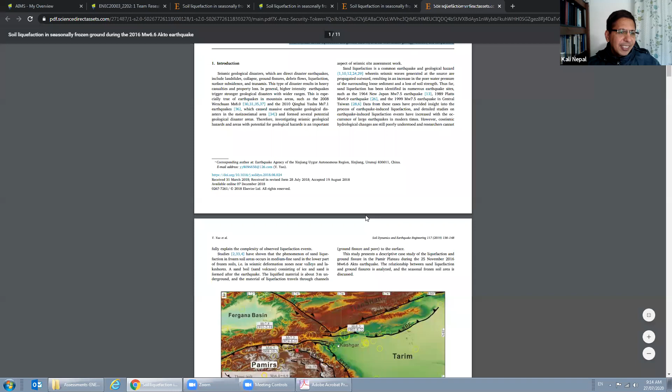Okay, look at this paper. So now I first learned the abstract, what it is all about, how they do it. There is an introduction, literature review, background, everything is there, right? Yeah. And at the end, oh, I want to know more about a particular thing now, right? So there is a list of references at the end of the paper. You see, now look at the references here. That many references. So now you can access any of those papers through the CQ library, right?

So you build on your skill, build on your skill, and then go inside, what we call it, dig deeper into the subject matter. And at the end, you summarize results. I want it like this. Okay, this is one of the journal articles. Of course, it depends on different topics, right? It's different for everyone. So I want exactly this type of journal preparation from you.

Okay, so I have provided the reporting template, and at the end, in I think week 7 or 8, you guys in a team will be presenting to all of the class what you found about that particular topic. Can you start, guys, now? You can choose any topic within your group, right? That's fine. I don't mind, but it should be a little bit more advanced level. It's not just the basics; for example, sieve analysis cannot be a topic. That's too simple for you, all right?

You cannot do the effective stress principle, because that's the fundamental in soil mechanics. You can't say Mohr circle. That is too fundamental. So you need to choose a little bit advanced level topic and investigate that topic. Any questions regarding this? It's okay, right? That's how we do the research investigation.

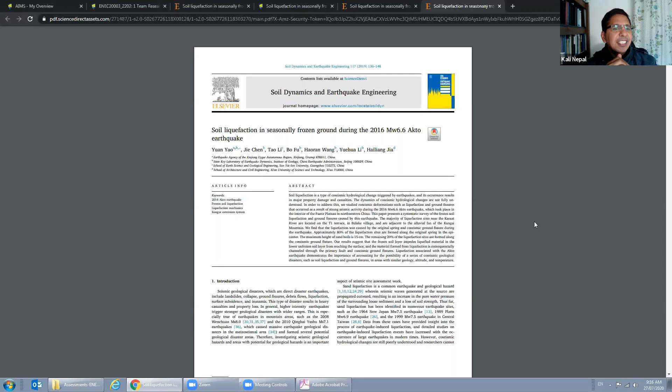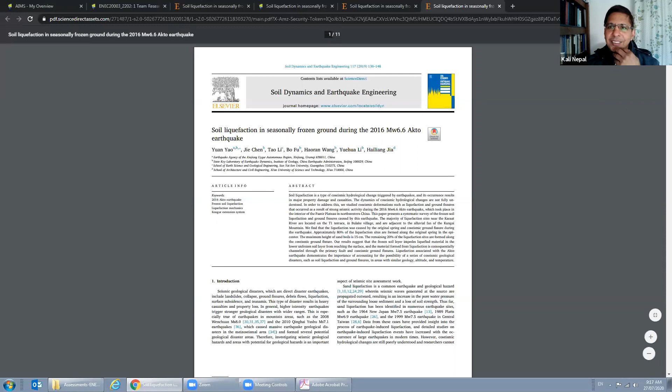Could you please discuss with each other and start preparing this? There is no one right or wrong answer. This is preparing you for how you investigate a topic that is new to you, how you investigate and do research. Is it okay? Can you do that, please? Start that right now, all right? If you don't have any questions, I will now move on to my lecture.

Okay, that's how I show you how we start investigating topics. So you see the report template is also there, how you write the report, right? And then there is a presentation template also given. So you need to present at the end. So overall, you will get around 30% marks from this research paper. Okay, you can build on, for example, new methods we learned in bearing capacity. There are a few new things we learned already, shallow foundations, bearing capacity.

Okay, so based on the literature, which method is the best out of those methods? I think that was the question asked by Kasun, right? Which method do I use? Yeah, so can you investigate based on new scientific literature, right? They reported some values of bearing capacity from the pile loading test, plate loading test. So which method gives the accurate result? You can investigate that too.

You see, you can further extend what we learned until now. So you need to choose the topics freely, please, and do the research investigation. All right. Is it clear? Did I make this clear? Okay. Now let's move on.

Move on to my teaching things. There should be somewhere. Yeah. So go back. So these are the resources. We are in week 3. Week 3 means we are starting pile foundation today. All right. Please, guys, do ask questions if you want, whether it is clear or not, but I'll start now. Okay. So let me connect my writing pad first.

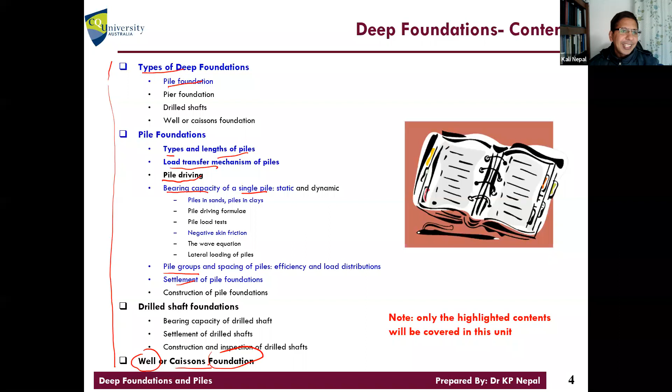If you want to choose one of the topics, for example, well foundations, or how we design caisson foundations, for your research, that's good. This is the extra thing to learn outside of your unit. So that's how we will be doing this week and next week. Do you know why we need to use deep foundations? Soil.

Because soil near the surface is not good enough to carry the load, we need to put the load transfer deep into the ground. There can be many situations. There is a high water table, meaning bearing capacity is low. If there is water, bearing capacity of the foundation is low, so it's better to transfer into the hard stratum below.

Sometimes when we excavate, it is too expensive to remove the soil and put the foundation at the bottom, so you can put the pile in. There are many cases you can read about. Pile does a lot of things.

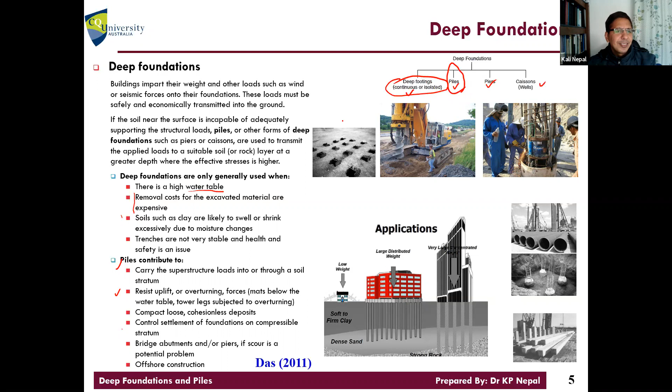So deep foundations, again, deep footings, or it can be piles, piers, or caissons or wells. We will be focusing mostly on piles. Deep footings, that is not that good, it's too expensive to excavate the soil and put the footing deep. So don't try to waste money and resources, just use the piles, that would be easier.

So this is pile. One thing it does is usually transfer the load into the hard strata below, because this layer is not strong enough to carry the load. Another thing is, even if at the bottom it doesn't reach a hard rock or bearing stratum, still it carries the load through friction on the side of the pile. And it can be used for lateral loading also, because piles are long and confined with the earth, so they can carry horizontal loads.

Also there are maybe sometimes swelling of soil at the top, but there is a stable soil underneath. It's better we go inside the deep soil layer and put the pile tip over there so that it can carry better loads.

Or it can be like, in this case, sometimes there is an uplift pressure, it goes up - I'll talk about negative skin friction later on. Because of the friction, the soil holds the pile in its place. Or it can be sometimes at the top there is erosion, so that even though it is eroded, because of the deep foundation, the pile at the top, still the structure is stable.

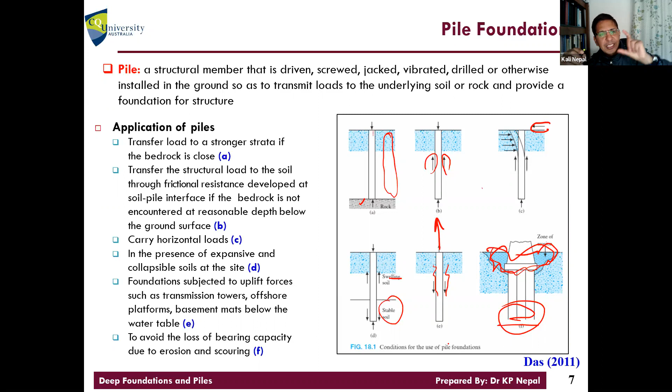So that's how we use pile foundations in different situations. Usually pile foundations are used if the bearing capacity at the surface of the soil, or close to the surface of the ground, is not strong enough to carry the load. So that's the reason, you can read those all.

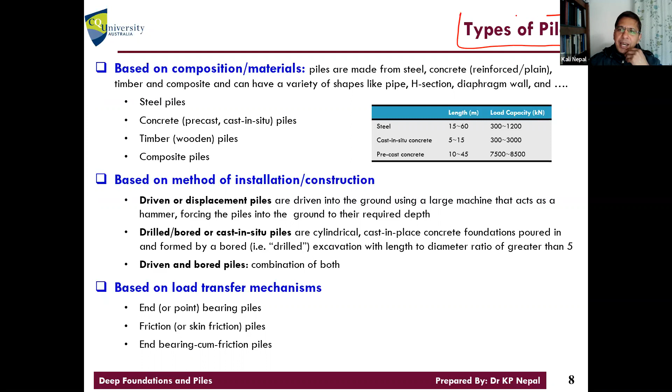So types of piles now. I have classified the piles into different types based on what type of material we use. We can use steel, we can use concrete, timber, or sometimes it can be composite. Steel and concrete are the most common ones. Concrete can be either cast in situ, where we cast it over there, or it can be precast and we push it into the ground.

Based on the method of installation, construction can be displacement pile driven, where we hammer it and put it inside. Or it can be drilled and then cast in, where we put the concrete in and it hardens later on and becomes a pile. And it can be a combination of both - some part we do cast in situ, and some part we do the driving, the piling.

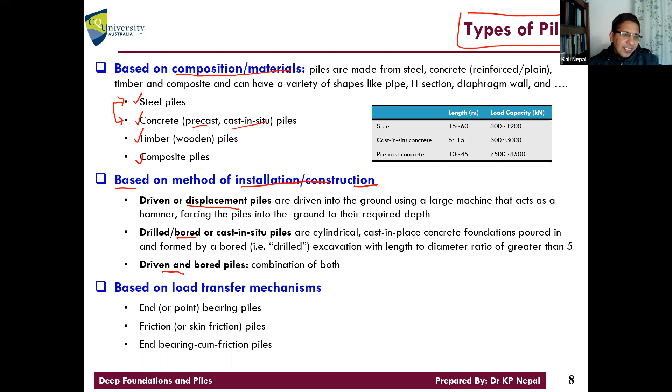Based on how they transfer load, we have end bearing piles, meaning they transfer load at the tip of the pile. Some textbooks write point bearing piles - that's the same thing. If the load is transferred entirely, or most of the load is transferred from the end of the pile, then we call it end bearing pile. If the load is transferred mostly through side friction, then we call it skin or friction piles. Of course, in many cases it will be both.

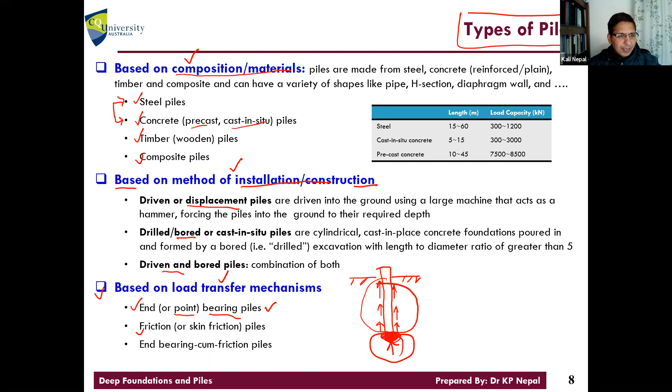The load is transferred from the tip as well as from the skin, the shaft of the pile. So it can be both in many cases. So look at this type, based on material, based on how we install them, and based on how they transfer load. Is it clear, right?

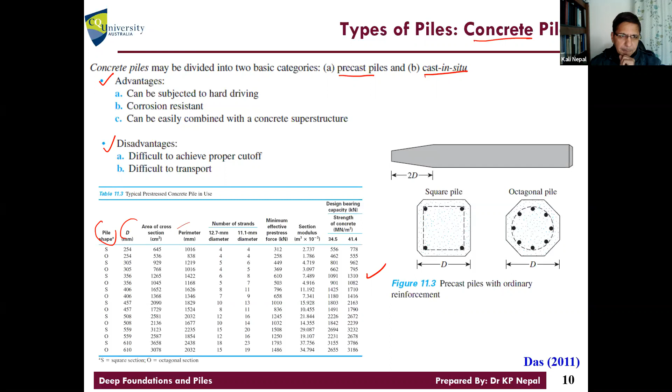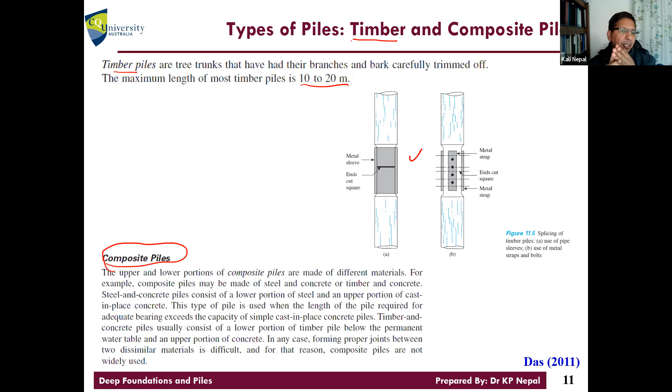Types of pile based on the second method is based on installation, how we install them. Sometimes we call it driven piles, which is the displacement piles. Sometimes we just cast in situ over there. Can I show you some video of how it is done?

Discard that, and if you click here I think it plays, but it's better if I play from my downloaded file so it will be easier for you to see. Take a break a little bit, and now we will be looking at how they are done. Where is the pile tube? First I want to show the steel tube, how they drive it. This is the pipe, steel pipe, right? Can you see it? Can you hear it? Yeah, it's okay.

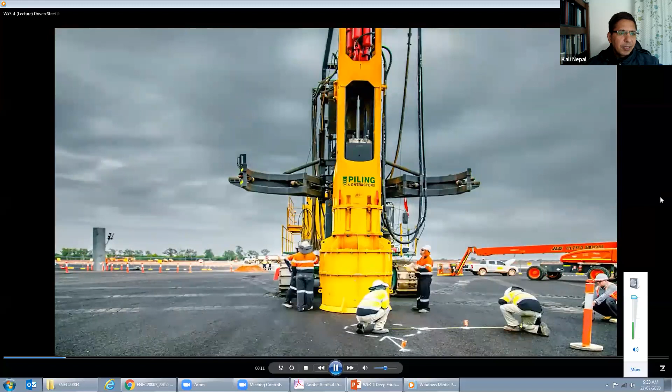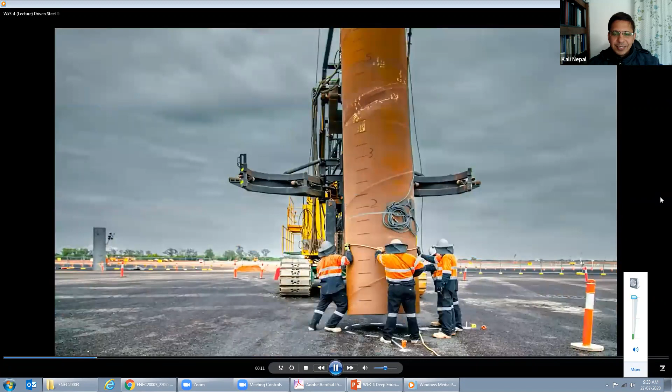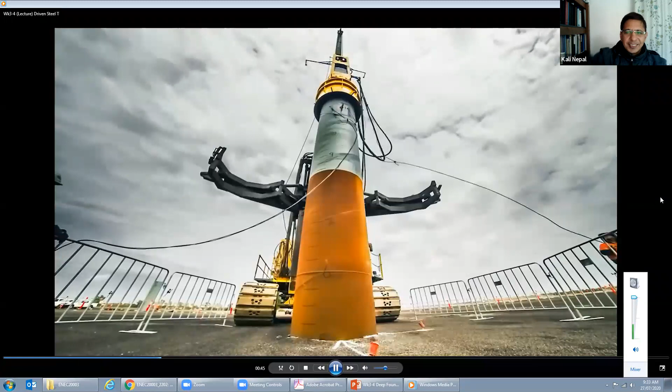Steel pipe pile. If you see something pushing from the top, it's driving in the steel. It looks very easy.

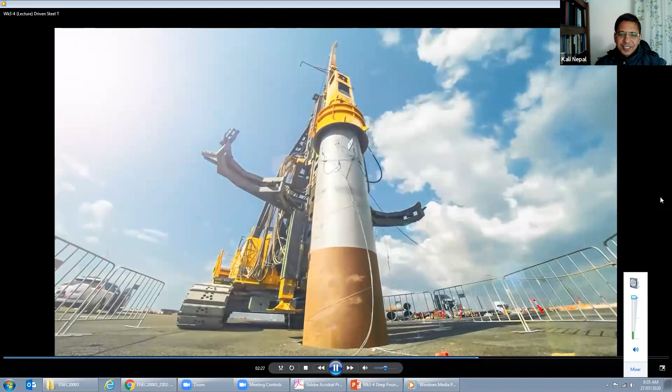Now see how they cut it. They mark it and then cut it using the equipment, if it is too long.

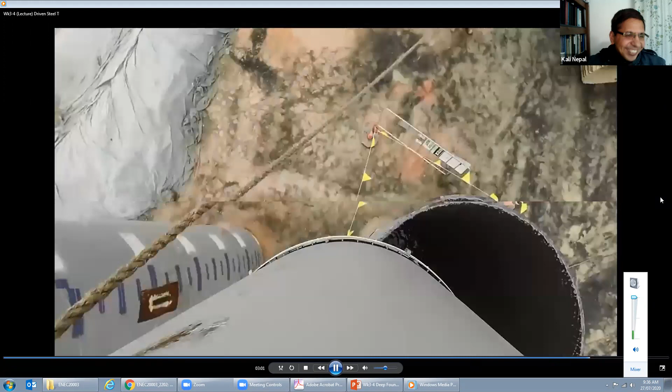How can I start this? Come on. Yeah, so that's the one, right?

So now let's look at how we do cast in situ, the second type, and I'll show you - it's about 3 minutes.

Continuous flight auger piling is a fast and economical piling method, ideally suited to wet or granular ground conditions, which otherwise would require the use of temporary casings to support the ground. Pile depths of up to 32 meters can be achieved using powerful crawler-mounted drill rigs.

A CFA pile is constructed by rotating a full-length auger into the ground to the required depth. Auger diameters from 450 millimeters to 1200 millimeters are common. The auger has a hollow stem, which is connected by a flexible hose to a concrete pump.

The hose and stem are charged with concrete before drilling commences. Once the auger reaches the required depth, concrete pressure dislodges a temporary cap at the base of the hollow stem, and concrete is pumped under pressure into the ground while the auger is withdrawn, carrying the excavated soil upwards. Different designs of auger cleaner require the auger to either be stationary during extraction or to be slowly rotated in the same direction as used when drilling.

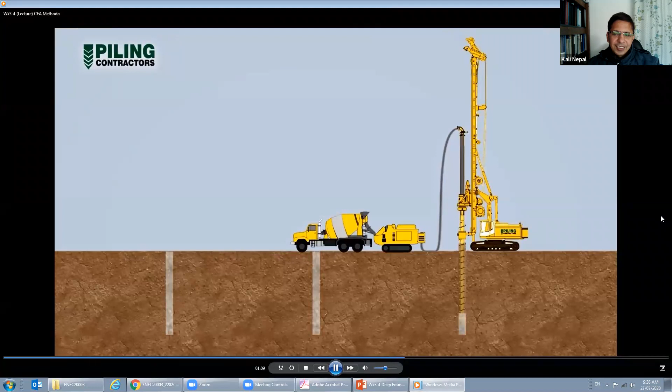Soil is floated up the auger and is removed by an auger cleaner just above the ground surface. Once the tip of the auger returns to ground level, concrete pumping ceases. The accumulated soil is then cleared away from the pile head.

Then a prefabricated reinforcement cage is plunged into the pile while the concrete remains fluid. Special attention to the concrete mix design is required to maintain its workability and to ensure that the reinforcement cage can be inserted to the required depth. The piled concrete is allowed to set before nearby piles are constructed.

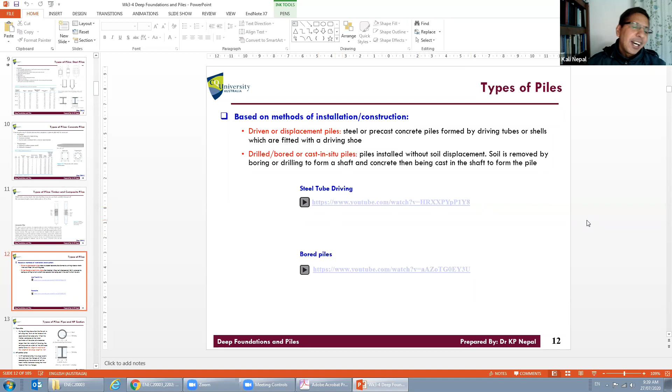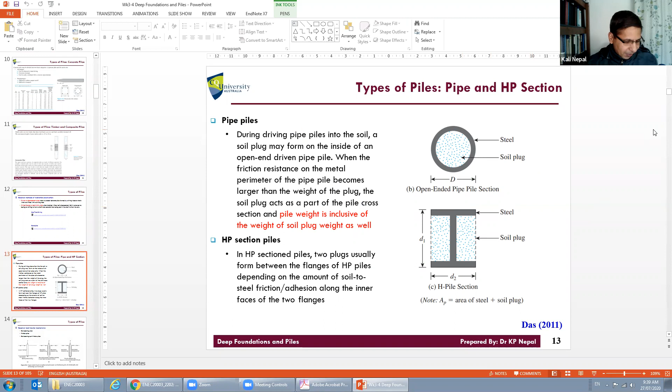As we see, when this pipe, that was what I was discussing before, can I just enlarge it? So that you see, that's the soil plug forms in the center. You see the pipe, that was what we saw in the video. So this plug also forms part of the pile now, right? Because it's full inside, the soil is inside, so this also works as a pile.

But sometimes we need to use both the plug and the pile weight to calculate the bearing capacity of the piles. Of course, H-piles, some people call them H-piles, sometimes people call them HP piles, again that's the same thing. So it also forms the plug, right? In between, this is the soil plug, and then this is the steel part in the flanges and the web or whatever we call it. Okay, so this is how when we drive the piles in. So these are the two types of soil plug that will form.

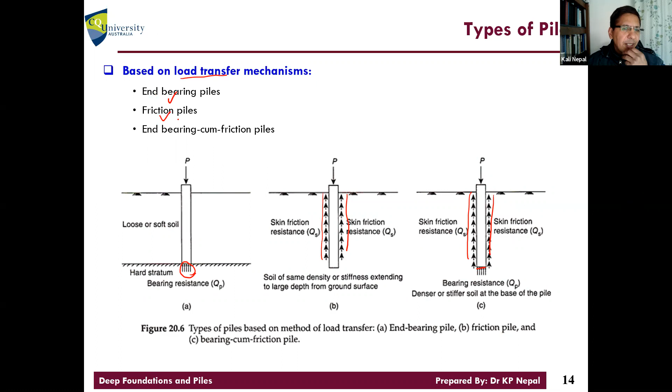Okay, third is based on what we call load transfer. Load is transferred from only the tip, load is transferred only through the shaft, or load is transferred through both shaft and tip. We classify these as end bearing, sometimes called point bearing, friction piles, sometimes called skin friction piles, and sometimes both. You see how the load is transferred to the ground, either through the shaft or at the tip point, so that's how we classify.

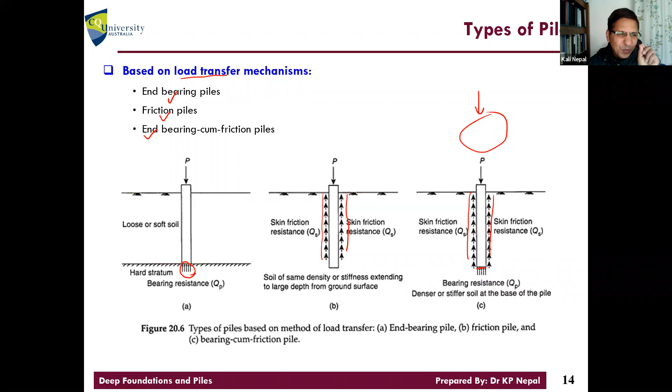Which is the most common one, do you think? Which method, which type is most common? This one, right? Most piles carry the load from the tip as well as through the skin. But there is a bit more research about something now, so I'm going to explain that next.

Okay, that's what is written. Usually, if the load carried by the tip of the pile is more than 80% of the total ultimate load, we call it end bearing piles. Same thing, if from the skin or the shaft, if 80% or more load is carried by the shaft, then we call it skin friction or floating piles. But in most general cases, it carries the load by both point and shaft. Some people write QS, QF, don't confuse with this, right? One is from the skin, this part of the pile, another load is carried from the tip of the pile.

So ultimate load is the sum of both, but there is a little bit of adjustment because of the weight of the pile and the soil replaced, if we are replacing the soil, isn't it? Yeah. Otherwise, mostly the ultimate load QU equals what? Load carried by the tip, we call it point, plus load carried by the shaft. So this is the case.

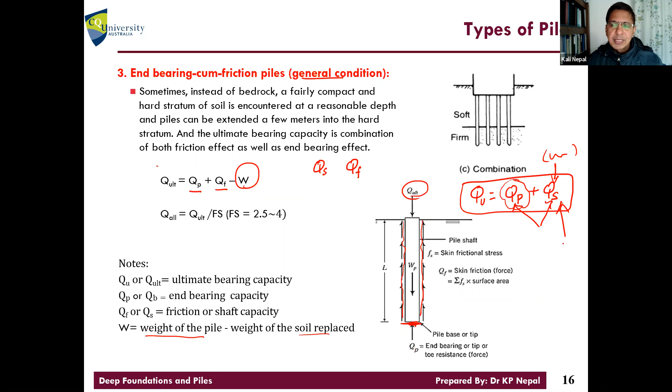But one research has found a little bit surprising result. Both of them don't reach the ultimate at the same time. When this reaches the ultimate, the other part is only partly utilized, not all of it. If this reaches the optimum, depending on the soil type, right? If the shaft load carrying capacity reaches the ultimate capacity, in that case, this may not be fully utilized.

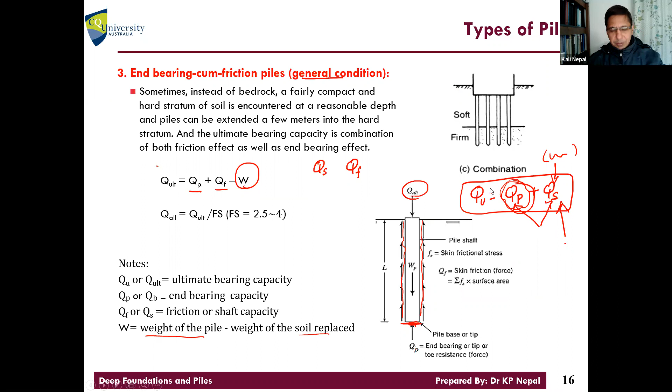I think you read this, I'll just highlight this one first. There is a lot of research, so you can read that. Ultimate end-bearing capacity and ultimate friction capacity, right? These two things don't occur at the same time. Look at this. This is a pile, right? At the tip, as well as in the shaft. They don't occur exactly at the same time. They are a little bit offset. So one is optimum, the other is not optimum. That's the observation made.

But it is so hard to find out what is what. So usually what we do is look at here. Q ultimate equals Q point plus Q shaft. But usually for Q allowable, we use a big factor of safety so that that particular disturbance is minimized. Do you understand what I mean? Both don't reach the ultimate at the same point, but that is so hard to find out. So we calculate the ultimate of both and use a factor of safety to be on the safe side. That's what we will be doing in this unit.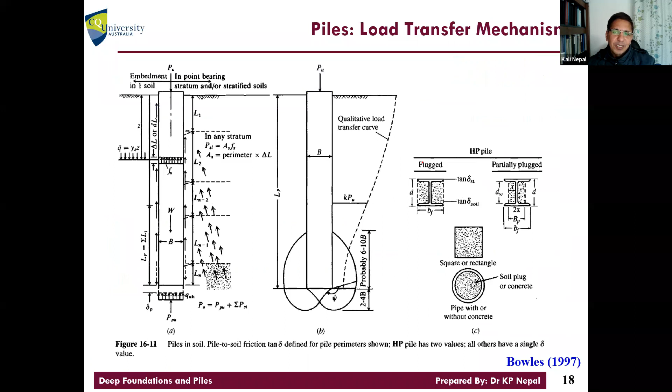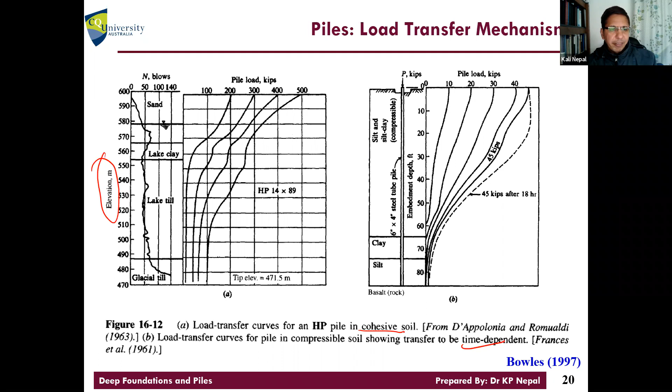So there are some investigations I have listed here, right? How they transfer the load, how the soil plugs form. This is from this textbook. And then how the load transfer is done with the depth of the pile for different types of soil, like cohesive soil, and how it is dynamic, time dependent, how it changes after a few hours. There is a lot of research going on. Again, this is just information for you, not what we can do now. It's research investigation. Just letting you know that point bearing capacity and shaft bearing capacity don't reach ultimate at the same time, so there will be disturbances.

There are many factors that affect the response when a pile is driven into the soil. Number one, how much volume of soil is replaced by the pile because of the soil plug, like closed-end piles. Another is the amount and type of overburden material. Piles penetrating soft clay into stiff clay: if the top is soft and the bottom layer is stiff, when you drive the piles, it carries a thin layer of soft clay with it into the next level down.

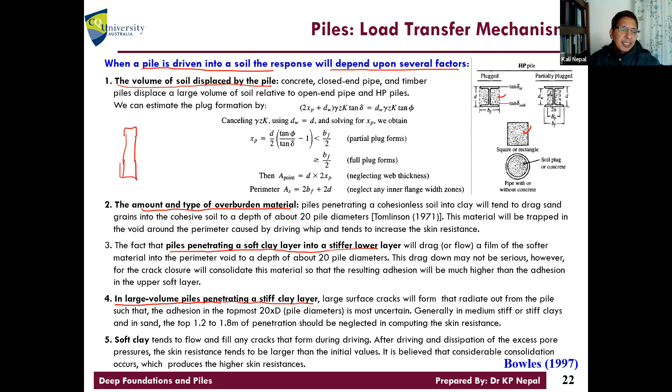Same thing with large volume piles. When it is going into very stiff clay, look at this. When you drive the pile, cracks develop at the top because of the driving force. So they suggest that if you are penetrating piles into a very stiff clay layer, the top 1.2 to 1.8 meter length of the pile can be neglected, because the soil is already cracking and failing. So there are many other considerations required. How much you need to know is up to you. I'm giving you some idea from the book.

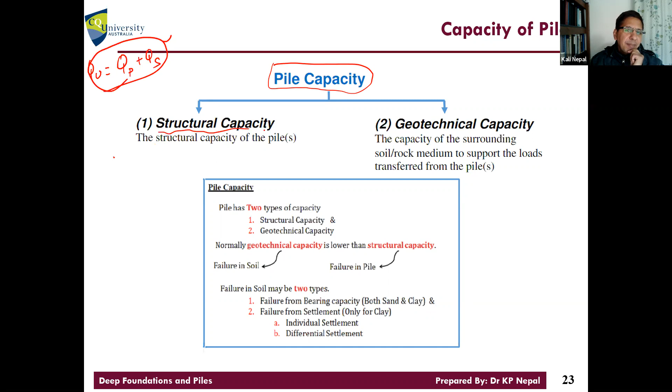So let's do the basic thing now. Pile capacity. How do we find pile capacity? You already know, Q ultimate is Q point plus Q shaft. But before that, pile capacity depends on structural capacity: how much the pile material itself can hold, whether the pile itself cracks. Another is geotechnical capacity. Which capacity are we interested in in our unit?

Of course, this is structural engineer guys. They will calculate how strong the pile is, right? Concrete or steel, those types of things are structural engineers; they do that.

How many of you are enrolled in the structural program in our degree? Oh, yeah, both of you, right? Okay, two of you are in the municipal program, isn't it, right?

Those guys who are enrolled in the structural program, I think you will do a few more structural units and then learn about the structural capacity of any structural member, right? But for us, we are interested in geotechnical capacity. Pile capacity has two parts, structural and geotech. Failure in soil is geotech, failure in pile is structural.

So in this case, failure from the bearing capacity, or failure from the settlement. Again, you remember my limit state design method. One is settlement, another is stress, right? Bearing capacity and settlement, we need to check both of them. So we'll be looking at only the geotechnical capacity. I'm not looking at the structural capacity of the pile.

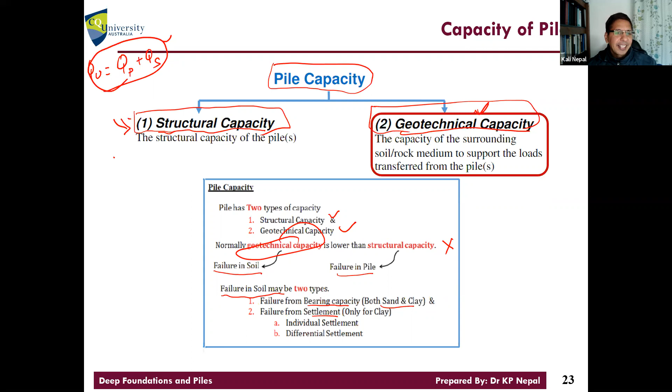Good. Okay, how do we find the geotechnical capacity now? Geotechnical capacity of the piles. Geotechnical engineers have developed methods to calculate the geotechnical capacity of the pile. Look at that now. There are 3 methods available.

First is you need to do the pile test, full scale pile test. You make a pile and drive it into the ground, and then you test how much load it can carry before failure. It is expensive, right? You make a pile and then you test it in the ground with a real full scale load.

That is hard. The second method is sometimes we analyze the soil, because we know the soil material properties, and then we do the static methods of calculating those. Static methods depend on the soil parameters only. So others are in situ test methods.

So there are different methods, right? In situ tests or soil parameters in the lab, as well as pile driving formulas to calculate. Look at this, 3 major ways to calculate the ultimate bearing capacity of the pile, or axial load carrying capacity of the pile.

But for us, we will just focus mostly on these methods, the static methods. So we will use some of the equations to calculate those, right? In our unit, of course, this is too expensive, and this is a different way of getting the ultimate capacity, but we will be looking at only the soil properties.

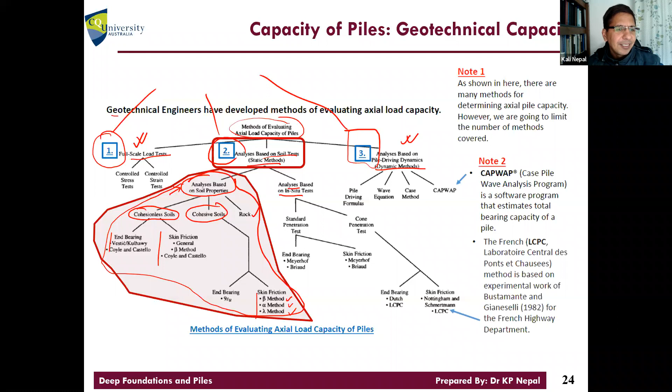Any questions up to now? No, right? Okay, here you go. So I have provided the description about full scale test, static method, dynamic method. But in our unit, we will be looking at the static analysis only, not the dynamic or the pile load test.

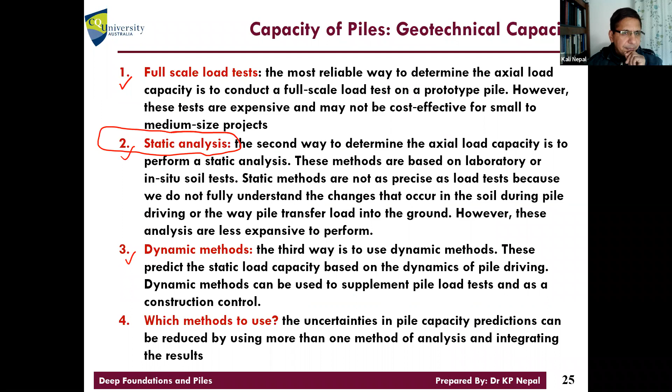So static pile capacity depends on 2 things, right? Pile capacity, let's say PU equals P point capacity plus PSU, or whatever they write. They write different things. Again, ultimate capacity is point capacity plus shaft capacity. Okay, so that's the main thing.

These are the methods used. Look at this summary of all the methods, how you calculate QP at the tip and QS along the shaft. You see, this is along the shaft. So we try to get QU equals QP plus QS.

Again, we learned one very good thing, right? They don't reach ultimate at the same time. Even pile load tests show that they don't reach ultimate at the same time. But again, we don't know exactly how it works inside.

So what we do is we calculate ultimate of both, and then we try to use factor of safety in order to compensate those differences so that we are safe in design, right? So

There is a general bearing capacity equation. Then we can use the Hansen method. We can use the Terzaghi method. We can use the Vesic method. We can use the Janbu method. Meyerhof, this is very important. This is the most commonly used method in piles, but again, others also we use. And there are methods based on SPT values, CPT values, Coyle and Castello method.

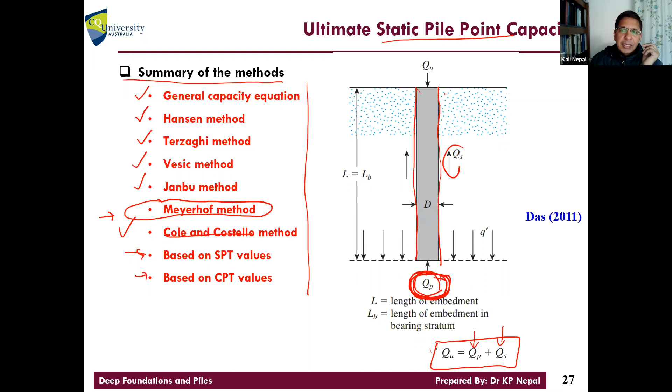Look at the methods. In these methods, we are looking at only the point capacity now. These methods are used for only the point capacity. For the shaft capacity, we call alpha method, beta method, and lambda method. I'll talk about this maybe in the next session, all right? For now, let's look at how we calculate at the point, at the tip of the pile, at the end of the pile. These are the methods we use.

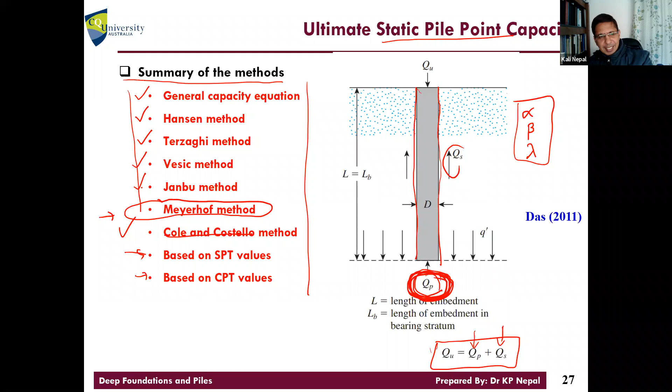Can I summarize them? It is a little bit confusing. This is the general capacity equation. Ultimate pile capacity at the point, right? I'm talking here about the capacity only at the tip of the pile. Okay, this is the area of the tip, area of the point. What is the area at the end?

That's the area, right? And then there is a calculation, bearing capacity calculations, right? Pressure. So if we multiply these two, pressure and area, you get the total load carrying capacity of the pile over there, right? This is the equation we use. This is the same. Look at this. This is the first term of the bearing capacity equation, isn't it?

C term. Can I write our bearing capacity, what we learned before? Q ultimate equal, what was the formula? c Nc plus q, this is the average overburden pressure effect, q Nq plus what? Half B N gamma, right? Oh, there is a gamma also. So this was the equation we use. The same equation is here.

There are a few variations here. That's what I want to talk about. So this first term is the same except the correction factors, right? Yeah, it's the same bearing capacity equation. But they have included this value. You see this, I don't know how you pronounce this. This is one of the factors.

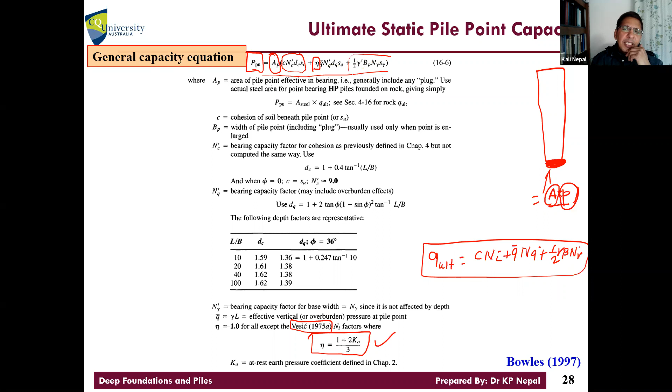This factor is 1 except for the Vesic method. Everything is 1, but the Vesic method proposes this, using the η value. So we can include η. All others are the same, right? So there is no difference. Another interesting thing is this third term in the equation we can neglect. We can just ignore this third term.

Can you guess why? Why does the third term not give that much bearing capacity for the pile foundation? We can neglect the third term very easily. The reason is, look at this. This is the width of the foundation, right? How much width do you have in the pile at the bottom, diameter or width? Very small, right? It will not be more than a meter or so. So these values become very small compared with other values.

Okay, can I show you now? You can easily neglect the last one, because pile diameter is small compared with the length of the pile, isn't it? So this term doesn't affect. We'll do a tutorial today, okay? So you will see how much is the effect of the third term. So only the first two terms are important. You understand now? Of course, depth factors, dc, right?

They are important because it is going to deeper depth. But the sc factors, the shape factor: how much does the shape change at the tip of the pile? Maybe circular, maybe close to square, or maybe H pile. Oh, not this way, this way, right? There is not much shape difference at the end of the pile. So the shape factor also doesn't affect that much. The only things that affect are the first two terms of the bearing capacity equation and the depth factor.

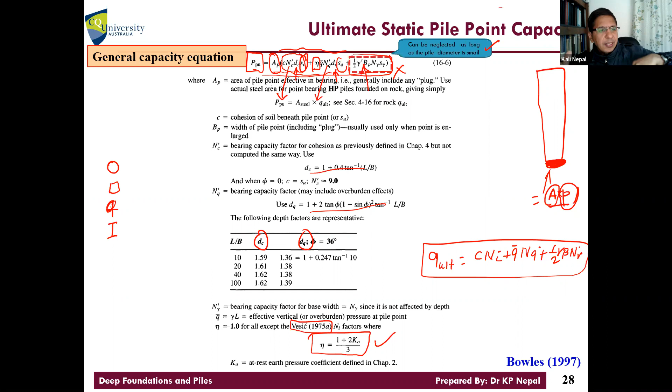But again, guys, these Nc, Nq bearing capacity values are not exactly the same as for shallow foundations. They are different because they are at a very great depth, right? The overburden pressure effect will be quite different than the shallow foundation because with piles, we are talking about the tip. So this is a very long pile. That means we need to use different bearing capacity factors.

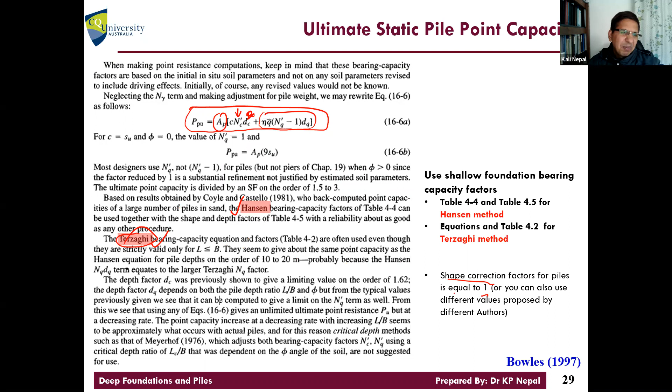Okay, but look at this. There is discussion here. We can use the Hansen method, Terzaghi method as we have in the shallow foundation. But you see, I have written some comments here. Shape factor is usually 1, but sometimes we can also use those proposed by those authors. But it is a very negligible effect anyway. So this is the same as the bearing capacity table in the shallow foundation. Hansen method, Terzaghi method, same equations and the same table we learned in the last 2 weeks.

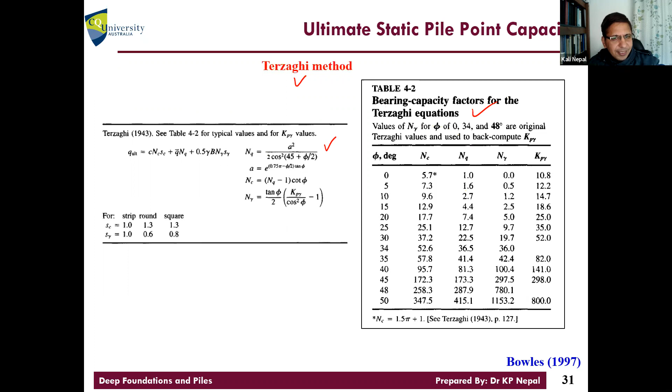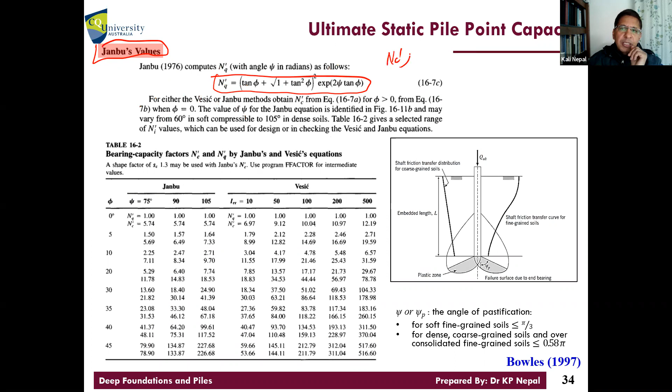Also, the Janbu method gives the Nq value, how it is calculated, and we can use the same approach as the Hansen method to calculate the Nc factors, right? First term bearing capacity factors. So this is the table given. So I would suggest you use the table for the Vesic and the Janbu method because calculating using this equation takes a lot of time.

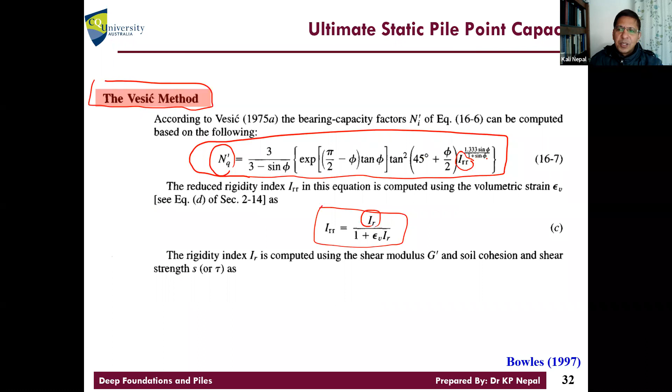All right, what time are we at now?

Okay, here you go. So if you summarize, that's it. Short-term behavior, if saturated clay, only the first term matters. If it is long-term, drained behavior, only the second term matters. You see, there are 3 terms in the bearing capacity equation. For clay, only the first term matters. For sandy soils, only the second term matters in our bearing capacity equation. All right?

Okay, I know you are already confused a lot, like me. So let's do one problem using all these equations so that we will know how to use these individual equations. Can we do one problem now before I finish, because I took a little bit long. Can you get your calculator and a piece of paper ready? So we try to use several methods. Of course, I haven't covered the Meyerhof equation, so I'll not go to Meyerhof now, but let's start.

What is this problem? This is tutorial exercise 3.1. Again, based on the list, we have several methods. We can use the Terzaghi method, the Hansen method, many methods, right? Can we use that now?

What is the question? The pile length is 25 meters. You see, that long. From here to here is 25 meters. Is that 25 now? 5 here, 18.5 there, 1.5 there, right? Okay, so that's good. So this is a total 25-meter long pile founded in the dense medium coarse sand. This is on the sand, right?

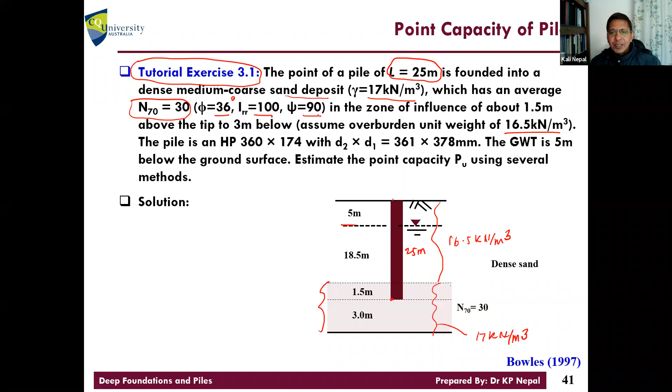Just leave it. So phi is 36 degrees, and this Irr, the rigidity index they require in the equation, is also given here, right? So now, this is the HP pile. This size HP pile with 2 dimensions is given by this data, right? Let's use all of those bearing capacity equations one by one. Can we use now the first equation? What is the first equation we learned?

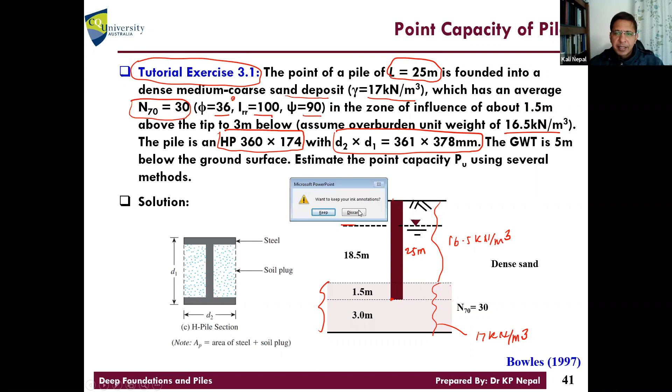Can I go back to, I discard that now. Can I go to my, what equations we use first? I wanna bring my writing pad first, okay? Presentation, this one. This would be easier to write. So can I do side by side so that you guys know, right? So now, side by side, what's the formula? So this is the one I'm doing, right? Okay, HP piles. You can see both of these, right? Okay, so now let's write here. Can I just remove this also so that it will be bigger in writing?

So now let's do this first method, right? Tutorial exercise 3.1. So what we are doing is only the pile point capacity. That means there is a pile, and we'll be calculating what would be the total end bearing capacity at the tip of the pile only. We are not talking about shaft now, right? So now we use just the point capacity only.

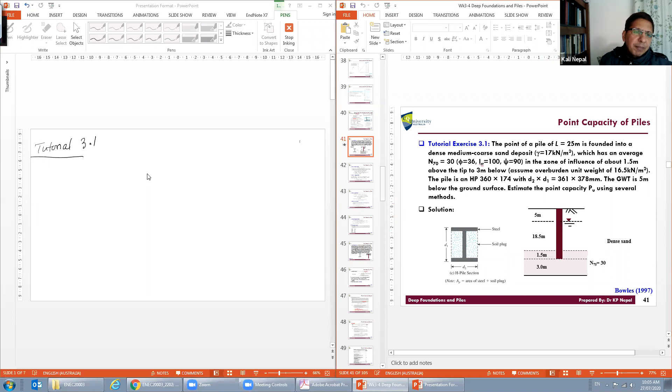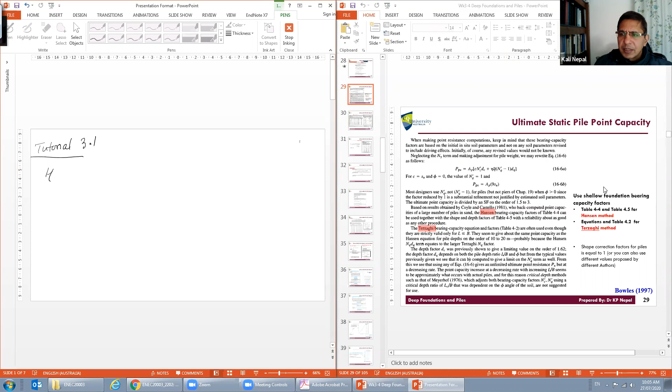So what is method one? Can I go back to my methods I discussed at the beginning? Yeah, first method is the Hansen method. So we use the same bearing capacity equations we learned before. These are the Hansen method bearing capacity equations. So what is the ultimate capacity now? Can I write the basic equation first? Yeah, this equation. So total capacity is point capacity from Hansen method, right?

You can see my writing, yeah? Yes. Okay, thank you. I'm just a little bit worried whether you can, because I'm trying to write side by side.

So Pu, the ultimate point capacity, would be what? Area of pile times c Nc dc. Of course, I already said s factors are 1 because the shape of the pile at the bottom does not vary much in length and width, right? Plus, what is the other one? The overburden pressure times Nq dash, right? Nq dash for Hansen is the same as bearing capacity in our shallow foundation.

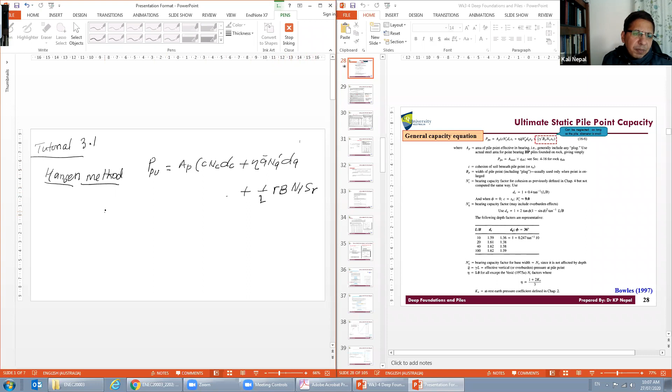And then again dq, plus half gamma B, so B at the point, width of the point, and then N gamma, and s gamma is always 1, right? So depth factor is not associated with this third term. So what I do now is try to calculate the area of the pile first. How much is it in our case?

Can I go down to the problem? So what is the area of the pile? That is the soil plug at the bottom, right? So d1 times d2. How much is it? Can you just interact a little bit? 0.361 times 0.378. Can you compute using your calculator? 0.136 meter square. So Ap we already calculated now. So what is this term now in our case? 0. Why?

This first term is 0 because it's sand. Sand has no cohesion, right? So only the clay has the cohesion. So only the second factor. So eta value for Hansen method is always 1.

Only the Vesić method, he has given another equation. You can see it in the lecture note. So can I calculate q bar now? How much will it be at this point? What will be the effective overburden pressure at this point, the bottom of the pile?

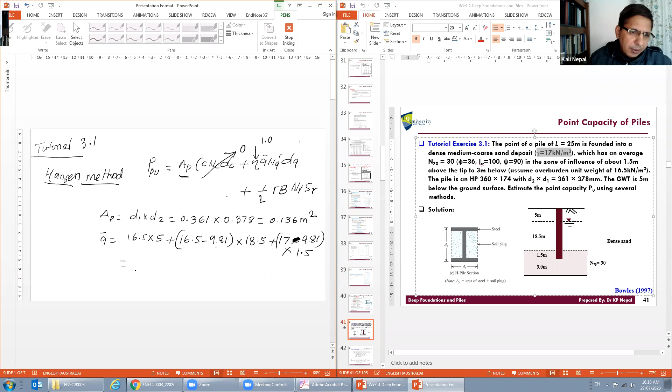What I did is layer by layer, right? First layer, second layer, and third layer. So that's what it is. But because I reduced the water pressure, because of the effective overburden pressure we need, right? Vertical stress. Come on, how much is it? How much did you calculate?

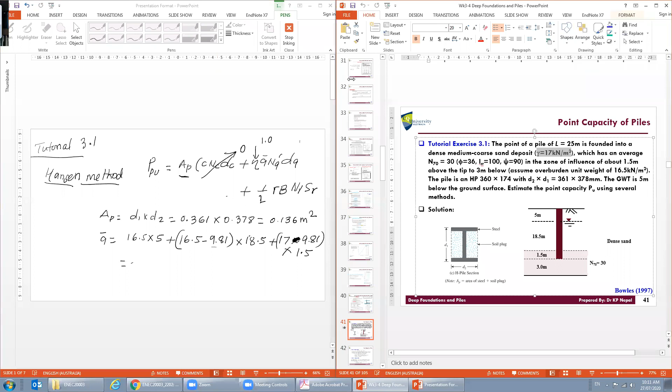217, right? That's Q, pressure, right? So now 217, can I do that one? I'm not sure why the color is not showing. 217 kilopascal, or kilonewton per meter square. We calculated that now, it's already done.

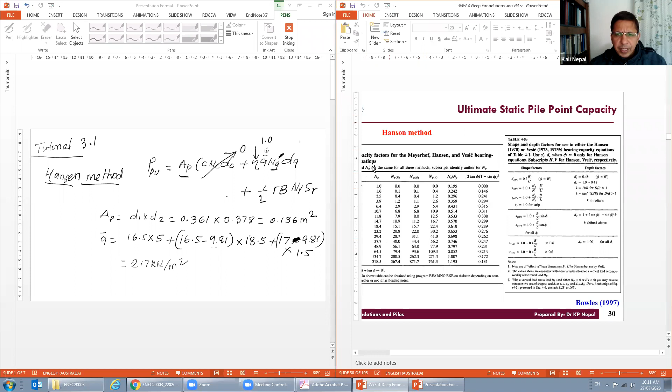So I need what? NQ value. NQ value I need from what? Table, Hansen table. Can I go back to the Hansen table now to see what is the NQ value? That one, right, Hansen method. So NQ, what is our angle of friction for the sand? 36, yeah, 36, right?

So NC we don't need. So only we need is NQ and N gamma, right? Yeah, there is a gamma, so gamma also we can neglect. I can show you later on, all right? Just the NQ is the most important part. So NQ for 36 is how much? 37.7, is it?

Do you understand how to look at this NQ value? So now you need to calculate DQ. Okay, DQ, they have given the explanation about what the depth factor for the second term here. You see the DQ value, look at this now. DQ depends on this equation.

That's the same equation as that. If you see, this is the same equation, right? That equation is the same. So why not you just straight use it? What is L by B? How long is the pile and the width ratio around? You can see here, depth becomes like 1.62 most of the time, but you can use the equation.

Can I do that now? So DQ, can I go to the next slide? Okay, so DQ I'm calculating now. So now, come on, it will be DQ, depth correction. Shape correction is not that important for pile, right? So we are not doing that. So DQ equals what? 1 plus, can I write this equation now?

DQ equal 1 plus 2 tan phi, 1 minus sine square phi, times tan inverse L by B, right? So I think that is also given in the table, this part. You see in the bearing capacity table, the Hansen table. So that's given, right? This one, 2 tan phi, 1 minus sine square.

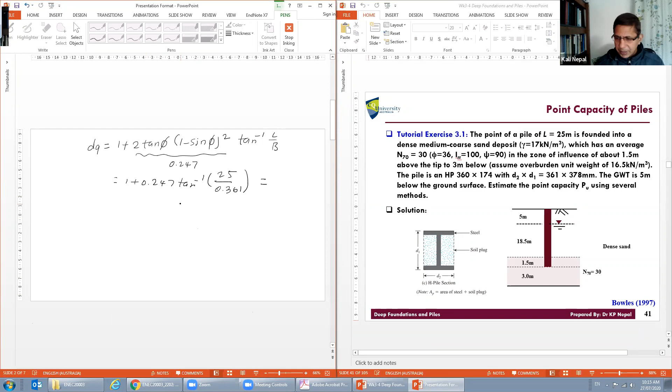Can I do my calculation? What happened? Can I do it now? So this is the calculator, right? So now 1 plus what?

0.361, right? That's the value inside. So this is tan inverse, right? What is tan inverse? Oh, what happened?

Are we supposed to take in radians? I think it's radian. Oh okay, so calculator should be in radian, otherwise it shouldn't be that big value.

25, is it 25? Is the length, right? Inverse. Oh yeah, radians, okay good.

Can you convert this, degree into radian? Times pi, right? Pi divided by 180. Oh thank you, it should be radian, not in degree.

Okay so 1.55, this is the second part, right? That part multiply by 0.247, I got the second part, and then plus 1. Yeah, 1.38, that makes better sense.

Okay so can you please convert this into radians? Come on, where is that? Because the depth correction factor shouldn't be that big anyway. So inverse, where is the pen? That one, right, so this is in radian, all right? Convert into radian, so the total is 1.38.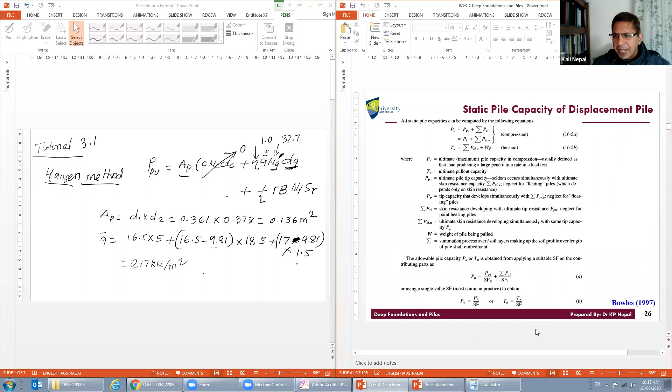N gamma value, how much is it? Can I get from the table? You can directly read from the table for Hansen, and then you can also compute for that.

But the third term will be very small. What is that gamma, gamma for Hansen, right? So how much is it? 36 is... how much the value N gamma? 40, right? Okay, 40, this one.

This is 40, right? Yeah, so everything is known. So S gamma is always, usually we take 1. I explained that before in the lecture, right? So we don't use any factors most of the time.

But Terzaghi we may use because there is a specific formula, but usually we say factor 4, we can use this also if you want, right? But again it doesn't affect that much. So I'll show you how it is done, all right?

Okay come on, so can we compute that now? All put the values now? What would be now, ultimate capacity based on Hansen method?

This one, what is this? This is the one, okay here you go. So now can I calculate what is the formula before? So AP, what is the AP we have now?

Yeah, PPU, the point capacity using the Hansen method. What is the area we calculated before? 0.1, how much was that? 136, right? Yeah.

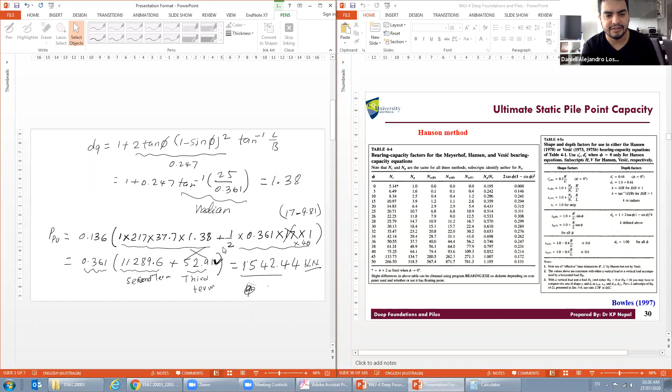That's it, at the end, it's 136. Oh yeah, that's a stupid typo. You see, yeah, that is 136, not 361. Okay, because that was what we calculated here, right? Before, can I go here? You see, 136 over there. All right, okay, good, so this is all right, right?

We got around 1,500, that's by one method. Can you do another method, right, before we stop here, and we'll continue after taking some break. Is that okay? So what is the second method? Maybe don't use Terzaghi, Terzaghi is too conservative for this. Terzaghi is only for shallow foundation. Ignore that, let's go to the other one.

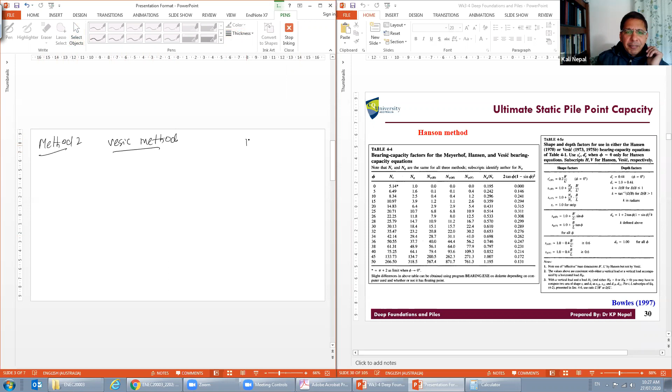What do they call it? Vesic method. Can I do now, method 2? Method 2, Vesic method, right? Vesic. So what this guy uses is this n factor, one more, right? Compared with others, right? Can I show you the equation now? Vesic method equation, you see, this is the Vesic method.

This is the NQ value you need to calculate, right? Look at the way, you can put that in if you want, right? That's a very terrible equation to calculate the factor, right? But I want to calculate this n factor first. What is the n factor for Vesic? You see, n equals 1 for all others except the Vesic equation, right? So can you calculate that n factor? Others would be similar, right?

Can I do that now? N factor equals what value? 1 plus 2 k naught divided by 3. So this is the only extra thing in the Vesic equation, right? Okay, all others we can take the factors from there. Can you do that now?

K naught equal 1 minus sine phi. That should be written somewhere. Oh, not here. So we will learn in lateral earth pressure theory, right? K naught is the at-rest lateral earth pressure coefficient, right? Usually K naught equal always 1 minus sine phi. Can you calculate K naught now?

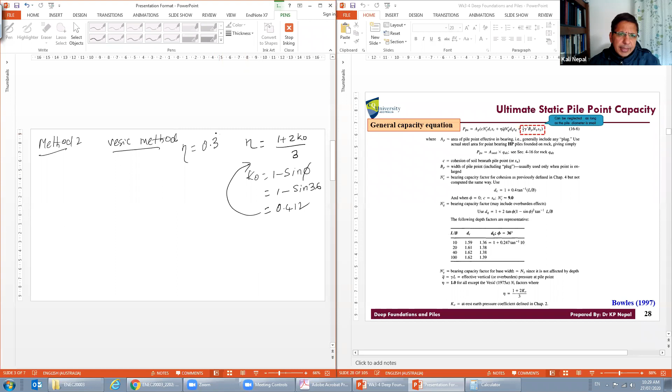Come on. 1 minus sine 36. How much would it be? 0.41. Okay, come on. 0.412. Can you put this back over there to calculate the n value? You see, this is the only difference in the Vesic method. Come on. 0.608, right? Maybe 608. Okay, that's all right.

So now let's go to the Vesic method and then check. There is a table, I think, for Vesic, right? This is the basic method. To calculate this, Irr is given, isn't it? So you can put Irr in these equations to get Nq, but I'll get it exactly from the table. So Irr given is how much? Is it 100 in our problem? Yes. It is too complicated to calculate Irr. They use a software program to get that value. But it's given here in our problem to check.

So 100, so what is the angle? 36 is not given, right? So Nq value, better to compute using the equation. Exactly that's not given, so 36, but I can interpolate a little bit. We don't need Nc, right? The second term we don't need, only the first term. 83.78. Nq dash. We wrote dash for the deep foundation, right? Nq dash is 83.78 when it is 35 degrees, right?

So what's the other one, the 40 degree one? 134.53, right? 134.55? No, 134.53 for 40 degrees. That's the one. So what would be the value for 36 degrees?

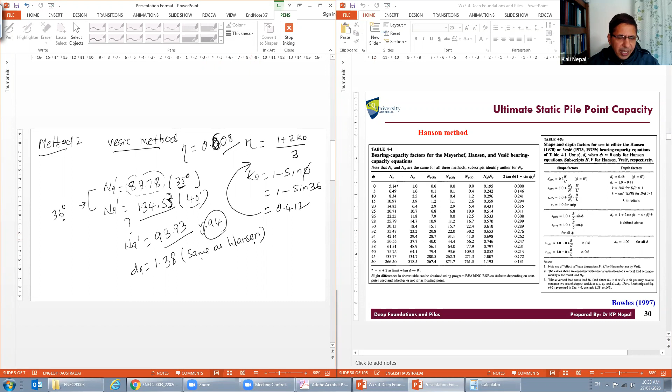Okay. So now you can also check from here, right? They have given the same equation here. You see, the dq equation here is also the same. Okay, so you can calculate dq using this equation. Some values are listed here already for phi equal 36 degrees, right? That's why 1.38, we already calculated that anyway.

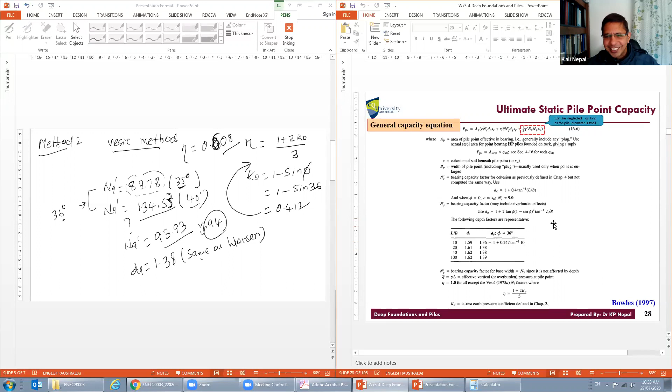All right, so now what is not known? I think we know everything, right? The same, and gamma is the same. Can we put it now in the bearing capacity equation? So now this is Hansen method. No, not Hansen. This is the Vesic method. So what I calculate now using the Vesic method is PU, ultimate point capacity, equal. Can I write the formula first? The first term is not applied.

Area of pile multiplied by, I think Vesic has this eta factor, and then Q dash, and then NQ dash, and then DQ, right? Let's say ignore the other one. So half gamma dash, it's gamma dash because of the water. Then there is B, N gamma, other terms we ignore anyway.

So can I do now 0.136? So what is the eta value we calculated, Daniel, just before? 0.608, right? Times Q dash. I think we already computed Q dash also, right? How much was that? 217, all right? We already calculated that, so I can use that value directly here.